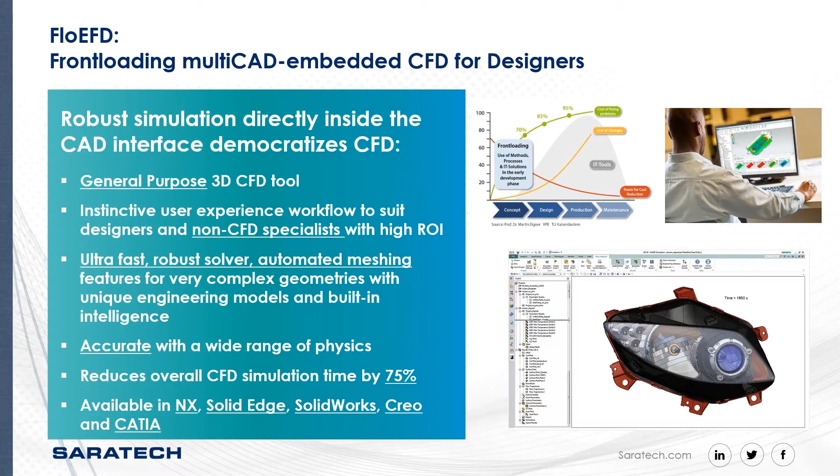So what are some of the capabilities? Well, FloEFD can be used in a wide variety of different applications. We can see here like mixing, electronics cooling, aerodynamics and flow problems in external analysis type conditions. We can do rotating equipment for things like pumps and fans. We can do combustion, radiation, aerodynamic heating, even free surface models now as well. So really a very well established general purpose 3D CFD tool, again, aimed at the designer rather than the analyst.

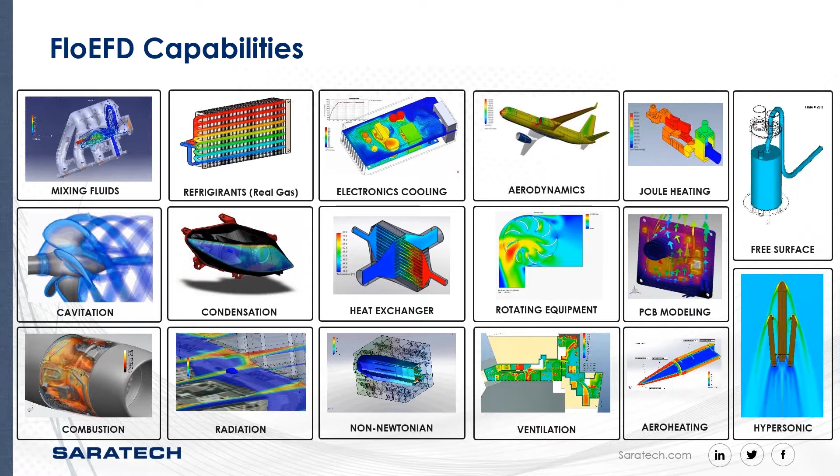So we're really trying to democratize this tool and get regular CAD users, Solid Edge and NX users, to be able to perform the analysis rather than having to go to that analysis team and wait for results to come back. So just a quick video of it in action.

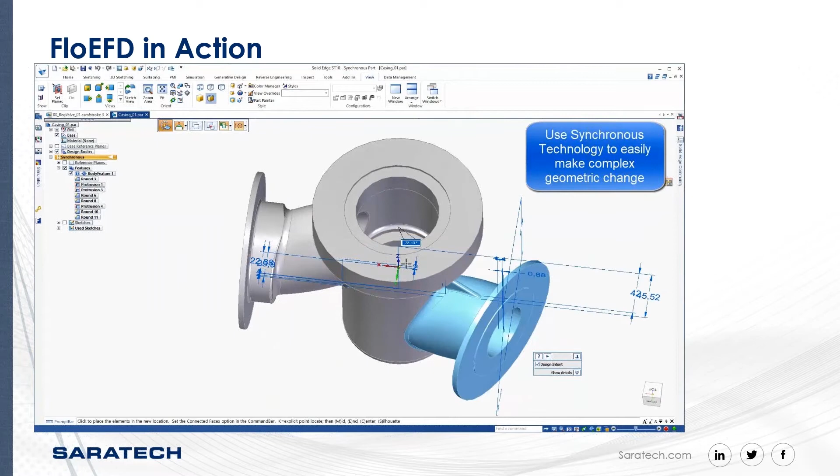So here we have flow through a valve in Solid Edge. The nice thing about being CAD embedded is that you can make changes really quickly. So let's, for example, make a synchronous change on this valve. We're going to change the angle on the outlet of the valve, so let's just rotate that through an arbitrary angle, maybe about 45 degrees. There's our updated geometry, and then our analysis will instantaneously keep up with that geometry. So there's a lot of benefits to being CAD embedded, such as being able to utilize that parametric CAD data and make changes really quickly.

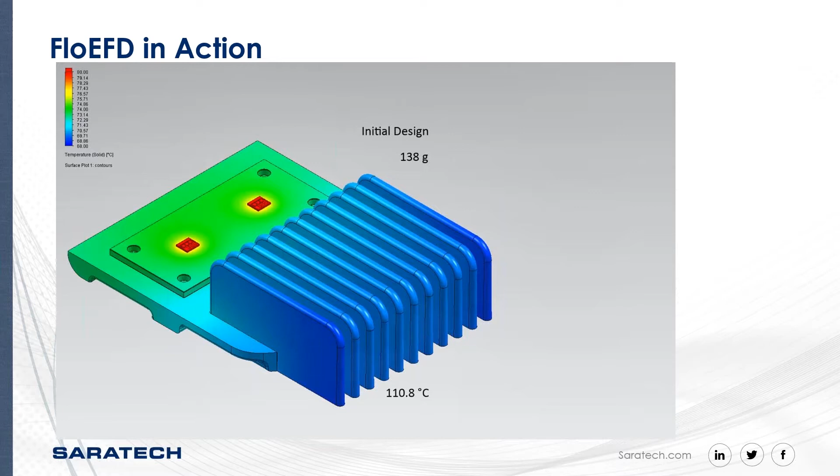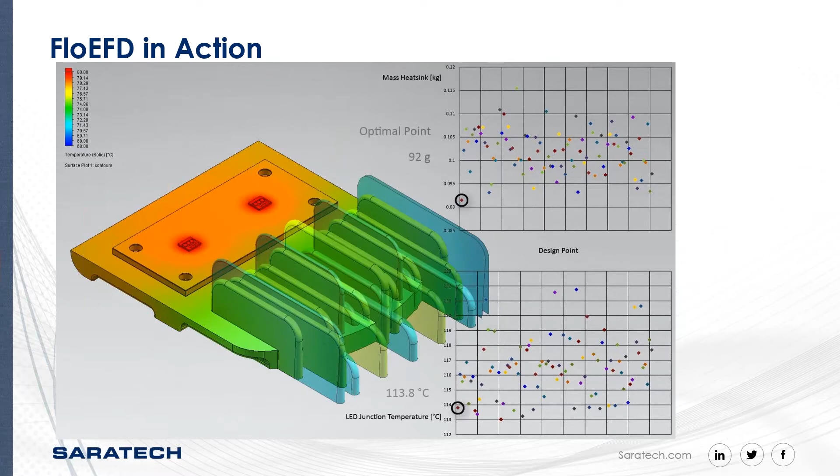Here's another example. So here's a heatsink that we're designing, an LED streetlight type example. We have an aluminum die-cast heatsink, and rather than just going with the base case design, we can start to do design exploration. And again, because we're CAD embedded, we can push and pull surfaces, we can control pattern parameters, we can vary the different heatsink fins to achieve the most optimal cooling for our particular application, within the constraints, the packaging constraints of the heatsink, the allowable sizes. So it really allows you to do that what-if study and optimize your design for performance, and being able to do that quickly within your CAD system.

So today we're going to be talking about mesh. Now in FloEFD, there's three different types of mesh. There's fluid, solid, and what's called fluid solid interface cells.

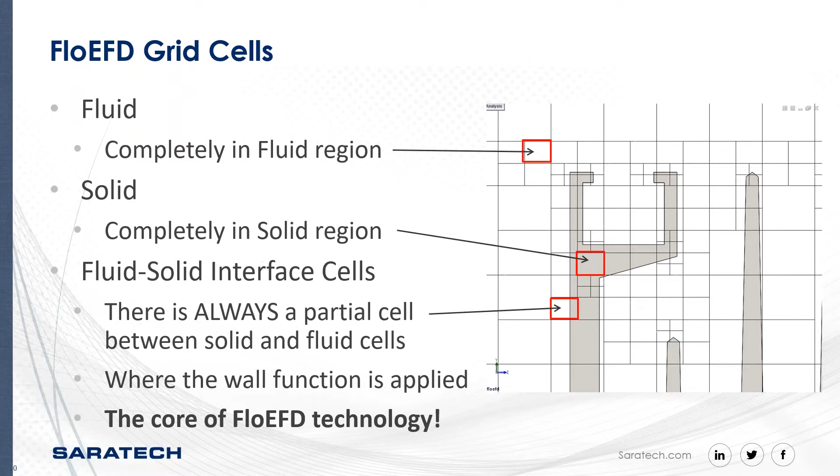A little bit painful — they used to be called partial cells, but fluid cells are completely within the fluid region, solid are completely within the solid region. Those are fairly easy to understand, but there's always something called a fluid solid interface cell between them. So here's a fluid, here's a solid, and there's always this interface cell. That's where the interesting stuff happens in FloEFD, because that's where the solid and the fluid touch each other, and that's where the convective heat transfer happens. That's where the boundary layer forms in the model, and that's really the core behind the FloEFD technology — being able to use these fluid-solid interface cells.

Now in FlowEFD, we use something called an immersed boundary Cartesian mesh. So what that means is that we create these cuboidal grid cells in the model, and then to refine the grid cells, we split that using octree refinement. What does that mean? We take a single large grid cell like this, split that into 4. It's actually 8 in 3D, so that's your octree. Split that into 4 again, 4 again, 4 again.

It's a very structured way of increasing mesh density, and it's very easy to add or remove grid cells if they're required or not. One of the main rules of FlowEFD is that neighboring cells cannot vary by more than 1 level. There's various different level sizes: level 0, level 1, level 2, level 3, and we'll see this in the demonstration. You'll see that you can't go from a tiny grid cell to a huge one. You have to go through this splitting ratio, this 2:1, 2:1, 2:1 ratio, and the aspect ratio of the grid cells is maintained as you go smaller and smaller.

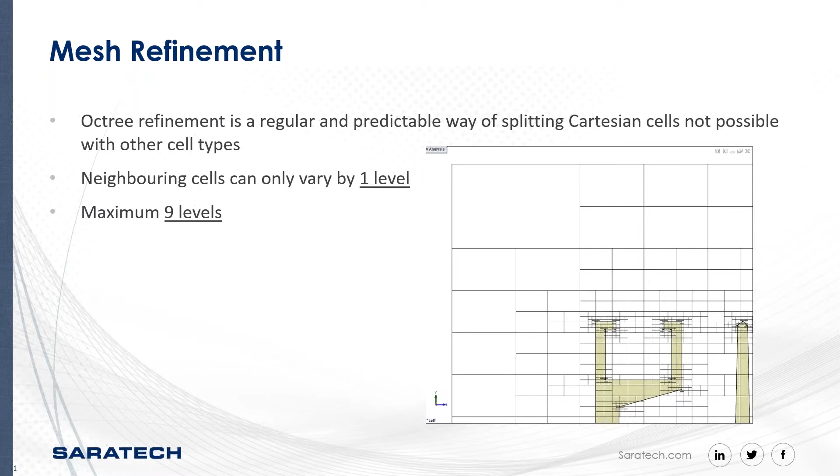Now, within solid cells, FlowEFD can have multiple materials, up to 36. When it's a conduction-only problem, the solid bodies defined by the CAD geometry are very well defined, and you don't need to increase the mesh density so much when you're just concerned with conduction. Convection is a different problem, or flow-based cells are a different issue, but for conduction, you can have a lot of materials in a single grid cell. Like this one over here has got 4 materials based on the geometry that's been created, for example.

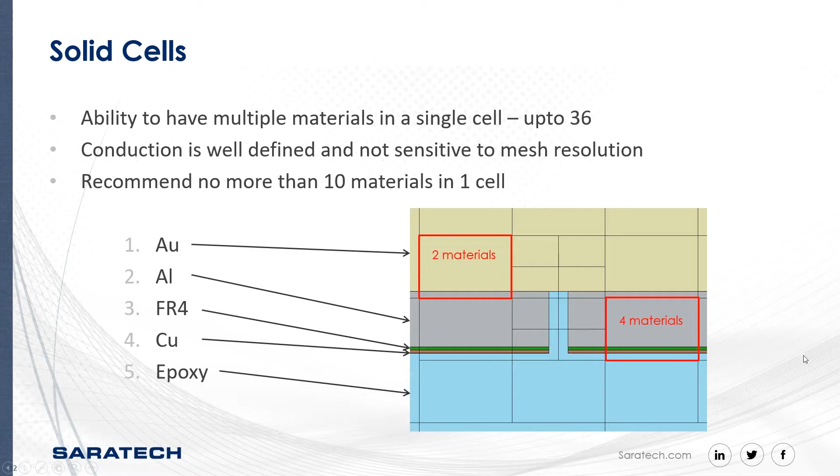I wouldn't be too happy running this grid cell without further refinement. This one here has got 1, 2, 3 control volumes. So we recommend no more than 2 control volumes per partial cell if critical, and 2 is the lowest that you can go down to in terms of control volumes.

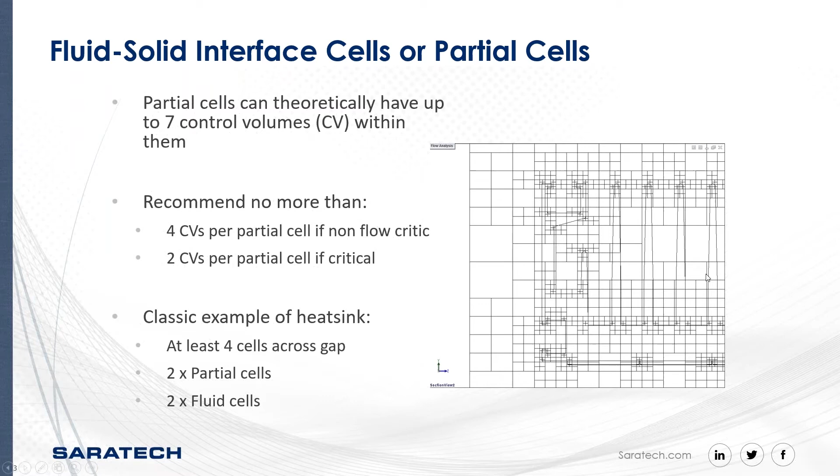Well, we can increase the mesh density. Remember the octree splitting that's going on. So we take that grid cell, we split it into 8 again. That increases the number of control volumes. So that cell previously has now been turned into like a 3 control volume cell with a fluid cell right next to it. We can keep refining and refining to increase the mesh resolution and also the result resolution.

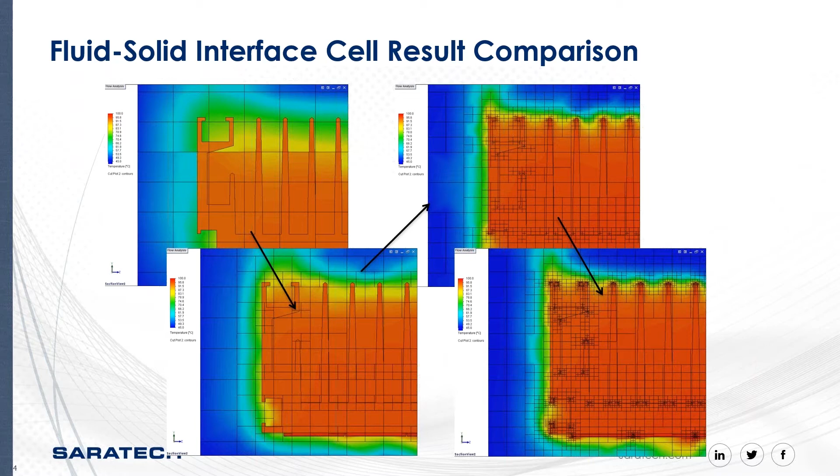So here we have a fluid-solid interface cell result comparison, where as you increase the mesh density, the image gets sharper, the resolution gets better. We're getting more accurate simulation results at the cost of higher computer resources and higher solve times. So there's always a trade-off between mesh resolution and the computer and time resources available to you.

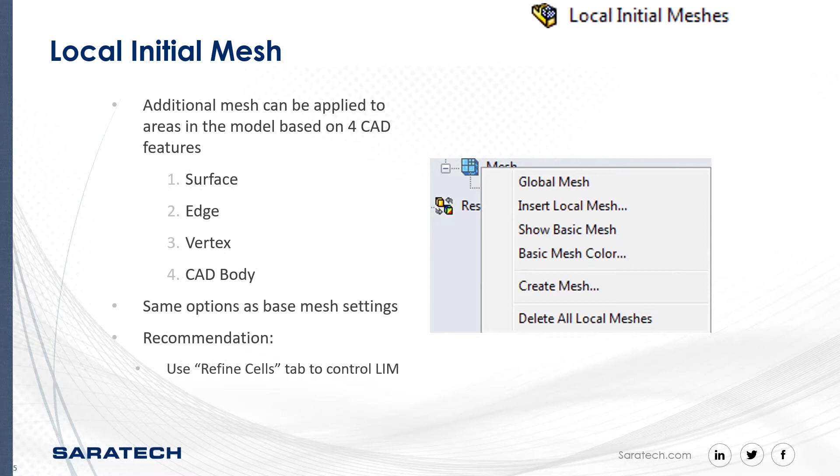Okay, so let's talk about actually refining the mesh. We can use something called local initial meshes in FloEFD to increase mesh density. We can apply a local initial mesh on a surface, an edge, a vertex, or a CAD body. By clicking on these parts in Solid Edge or NX, we can increase the mesh density using the leveling system. Okay, so I'm going to skip over that one.

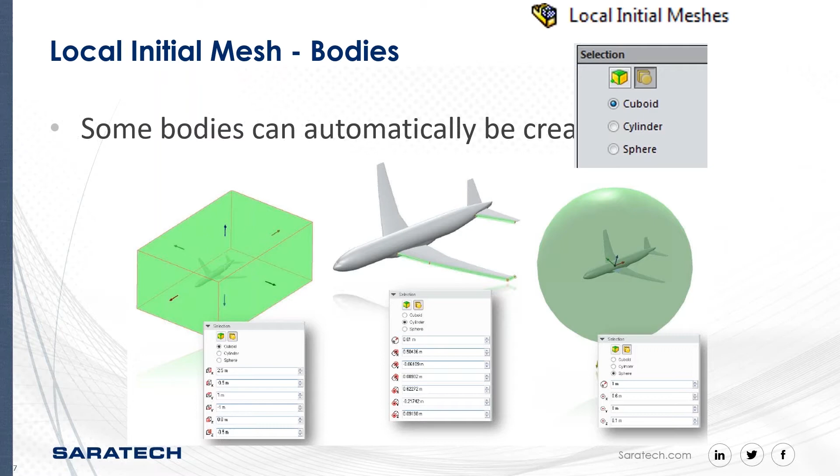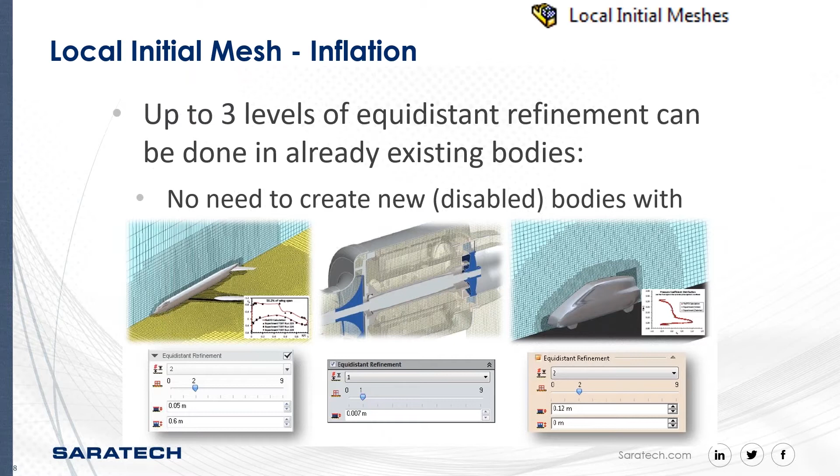We can also use bodies, arbitrary bodies, cuboids, cylinders, or spheres to actually increase the mesh density wherever we want, and we can size those and place those wherever we wish. And we also have something called inflation in the model as well, which will increase the mesh density as you move away from a body, which is particularly useful for external aerodynamics type cases.

So what I want to do is just kind of jump into the software and show you a little bit of that. First of all, I wanted to show you in the NX version. So this is a quick release fluid coupling. You probably use one of these at least once a week. Whenever you fill your car up at the gas station, this is a breakaway valve.

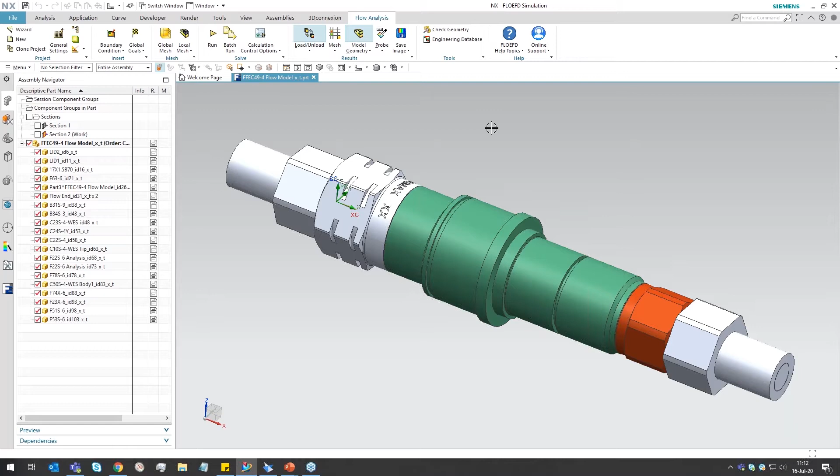So if you leave your gas nozzle inserted in your car and you drive away, this is the device that will break away and keep the gasoline from spilling everywhere. There's a male part and a female part, they connect together, and they're designed to break away and quick release with minimal fluid loss.

And if you're a designer designing something like this, you want to make sure that you're getting sufficient flow through your valve whilst minimizing the pressure loss in the system.

What's the actual upstream pressure required to overcome this resistance that this valve is causing to your fluid system?

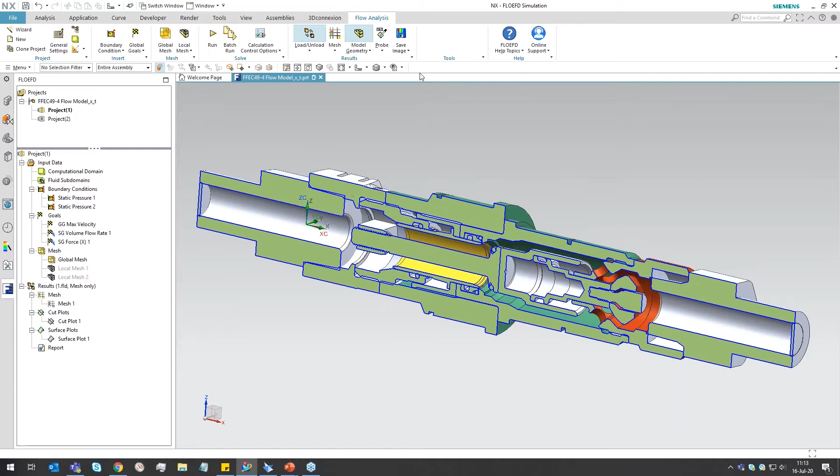Okay, so let's have a look at the FloEFD mesh first of all. I'm just going to go normal to the screen and visualize what we call the base mesh.

The base mesh is overlaid on the screen, and these are level 0 grid cells, and I've manually set these to 2 millimeters in size each.

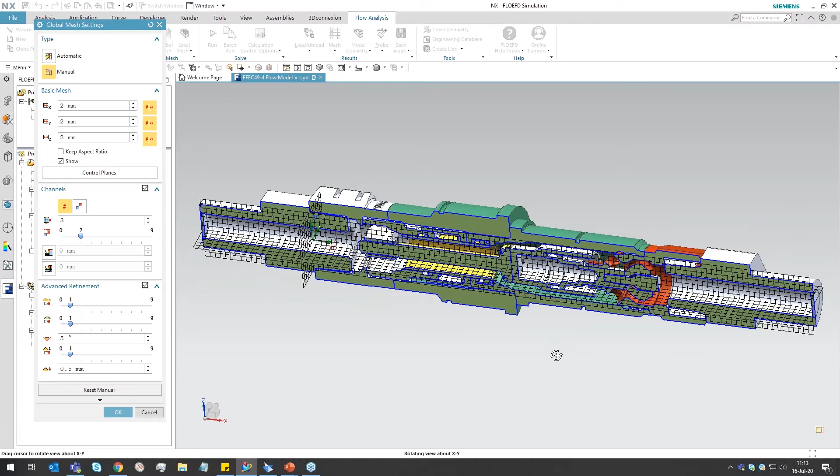If I just rotate that in 3D, you can see that in all three directions we've got these 2 millimeter grid cells, and that's important to keep these values as uniform as possible, so we've got that nice aspect ratio of 1 to 1 to 1.

Now, like I mentioned, this is your level 0 grid cells. To increase the refinement level, we can actually preview that, and it's struggling to see that, so let's go to display refinement level.

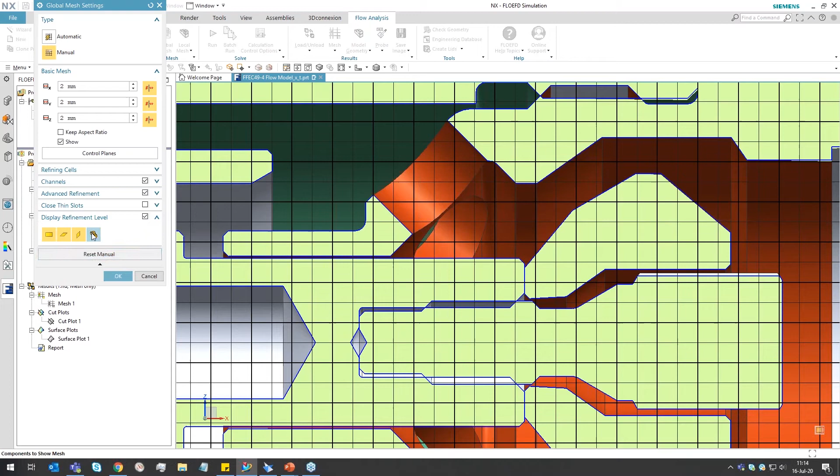Okay, so you can see, here's my level 0 grid cells. As I move this slider bar up, look how they split into 4 again. So if we look at this one, for example, or this one, level 1, level 2.

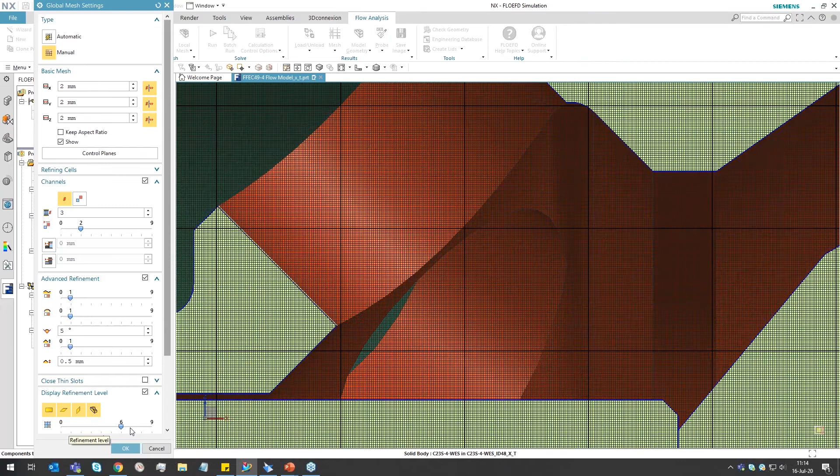Level 3, 4, so you have this exponential increase in grid count as you go down and closer and closer, all the way up to a maximum of level 9. If we zoom out, it looks completely black now because the grid cells are so small.

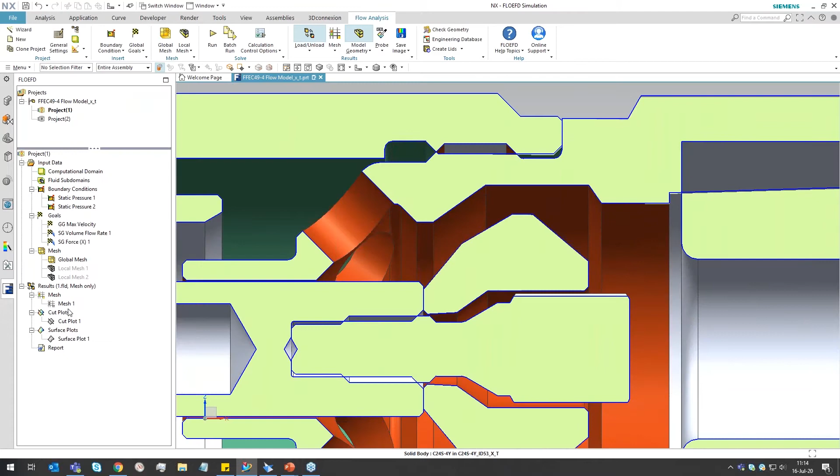So you can control the mesh density using these slider bars to increase or decrease the mesh resolution based on your requirements. Now let me just cancel that and actually show you what the generated mesh looks like.

So here, based on automatic settings, the software has created the grid and they're colored by this refinement level - level 0, level 1, level 2. And I've stopped the mesh from increasing beyond level 2.

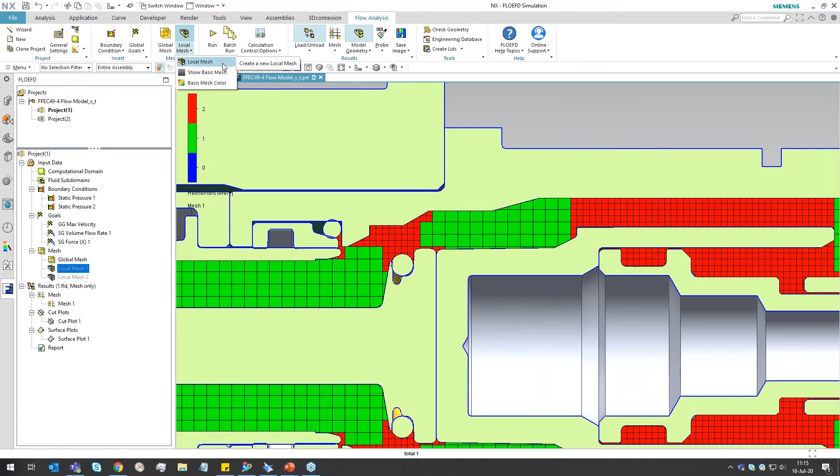And if we now start to use local initial meshes, which are up here, you can see that you have this local mesh option. I'm going to turn on a couple of local meshes that I've created previously.

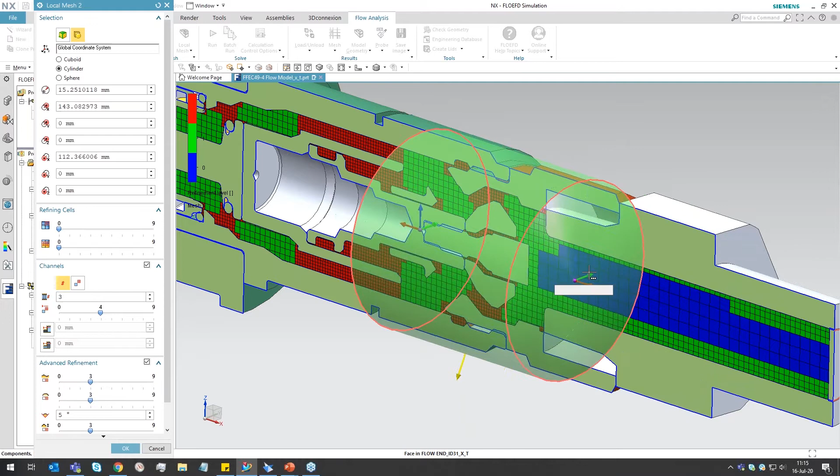So one of them, for example, is a cylindrical local mesh region. If I go into the properties of this, you don't have to create an NX part or anything like that - it's just a cylinder, which I can click and drag, make larger, make this taller. So you can create these arbitrary volumes, position them, and then tell the software that you want increased mesh resolution in those areas.

And I'm going to mesh the model real quick. This just takes a couple of seconds. It's a pretty small model, so it's just preparing the model now.

It's mesh refining. I'll get a feel for what the total grid count on this model is going to be. I know this is pretty low, but this local mesh is a way of increasing it from the base that we saw just a second ago.

So we'll just let this finish capturing. Should just take a few seconds here. And then look, we can see we've got...

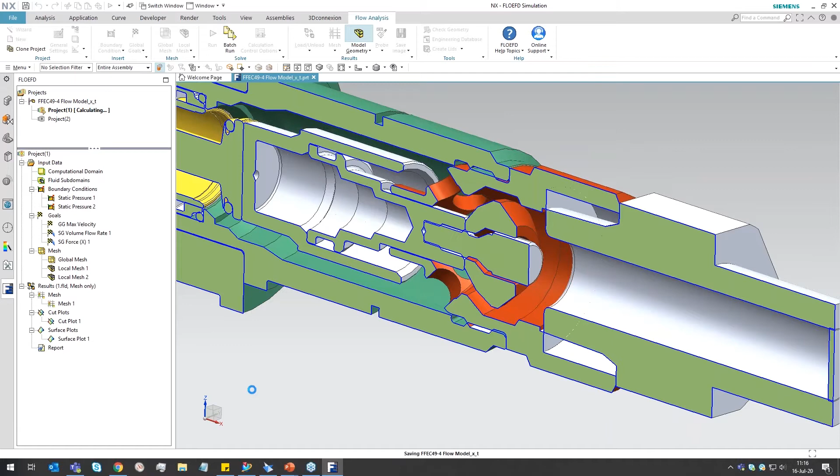350,000 grid cells total. Okay, so that's interesting. That's important information for me because that will tell me, right, do I have enough RAM in my machine to solve that? Absolutely, 350 is next to nothing, so that's no problem whatsoever.

But now if we look, and let me just auto range this - all right, so now if we look, we've got much finer, smaller grid cells in these small gaps, but only within that region that I specified, right? So it hasn't put them everywhere.

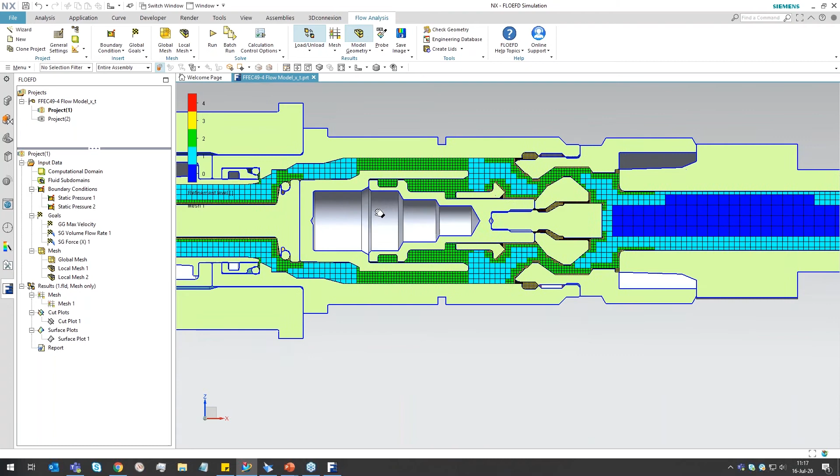I've also got finer mesh around this threaded portion and this valve over here. So you can apply base grid and then local initial meshes within the model to increase in certain critical areas that you yourself have defined in the model.

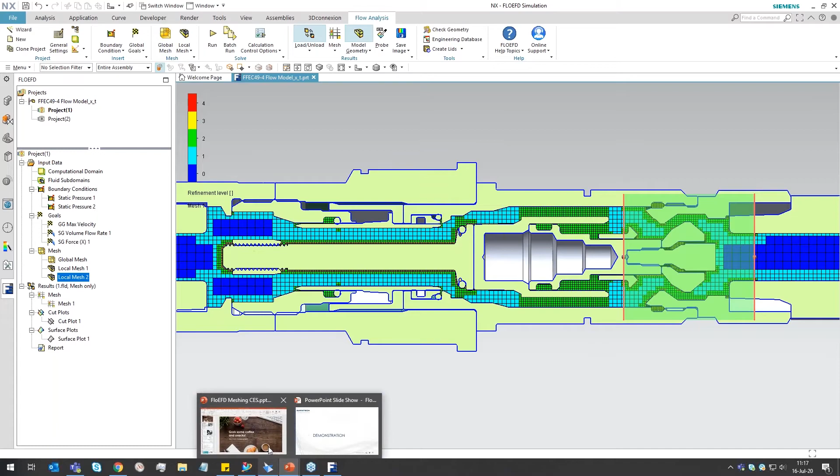Okay, so let's go back to the PowerPoint, and we're going to talk about solution adaptive meshing next. So this is a very advanced feature available to everyone - you don't need an extra license or anything like that, it comes with the base FloEFD.

But what this does is it will increase the mesh density based on the actual solution. So if you're finding that there are flow separation zones or high turbulence zones or areas of high parameter gradient,

like temperature gradient or velocity gradient, the software will recognize that and realize, I need better resolution here because there's too much of a change within this cell.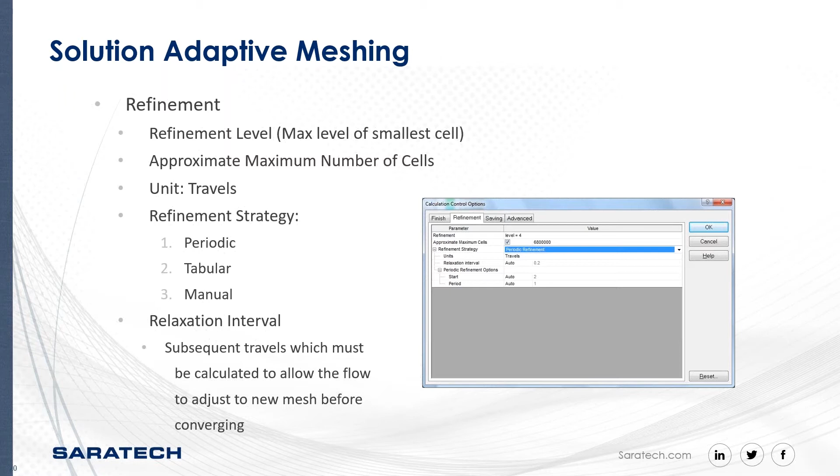It will then split that cell, and split it again, and split it again until the gradient parameters have been satisfied. Okay, let's look at an example.

So here's a filter. We've got flow going from right to left. It goes through this screen. It's a hydraulic filter, designed to remove larger particulate matter from hydraulic fluid.

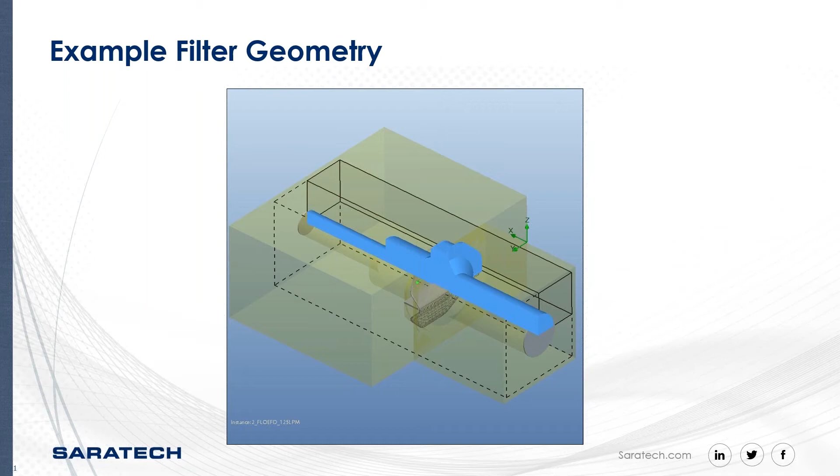And what does that do to the results? Well, a bit like a digital picture, the more grid cells we have, the finer the image or resolution is going to be. The more pixels we have, the better the resolution, but the more space it takes up on your disk.

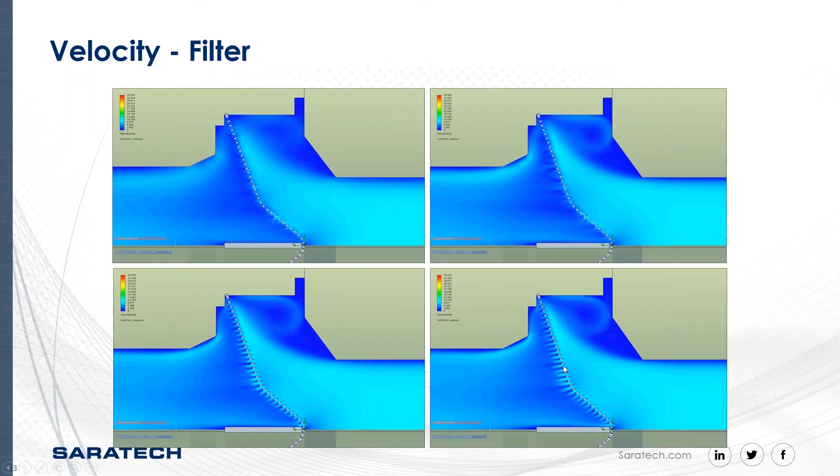So you can see as we increase the mesh density, we start to see finer features in the flow. We start to see these little jets forming, and that's a direct result of that extra grid around the filter element.

What we're really looking to do is achieve a mesh independent result. That means we need to manually increase the mesh density in the model until the results stop changing. So here's the delta P, the pressure loss through that filter, against an increasing mesh count.

Here's our first one with a really coarse mesh. So how do we know that result's any good? It's giving me 4.2 bar of pressure loss. Is that the right answer? I don't know. Let's double the mesh count and see.

Well, when I doubled it, the result dropped 6%. That was nowhere near good enough. Let's double it again - the results dropped 9%. Yeah, that result wasn't good enough either. If I double it again, it only drops 1% this time.

So probably this was okay. And if I double it again, it only changes 0.5%. So this is a test you need to manually do to understand if the grid you've applied is any good. FloEFD tries to make that as easy as possible for you.

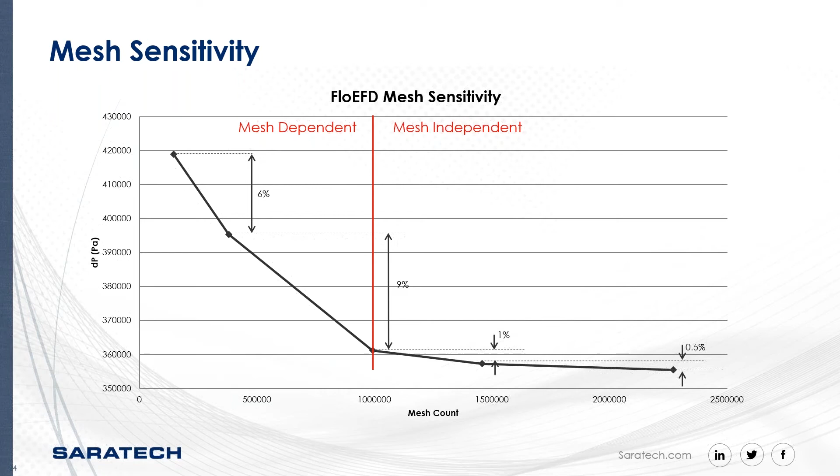I'll give you another demonstration. So here we have an aircraft. This time we're in Solid Edge 2020. FloEFD works exactly the same way. Let's have a look at the mesh that's been applied.

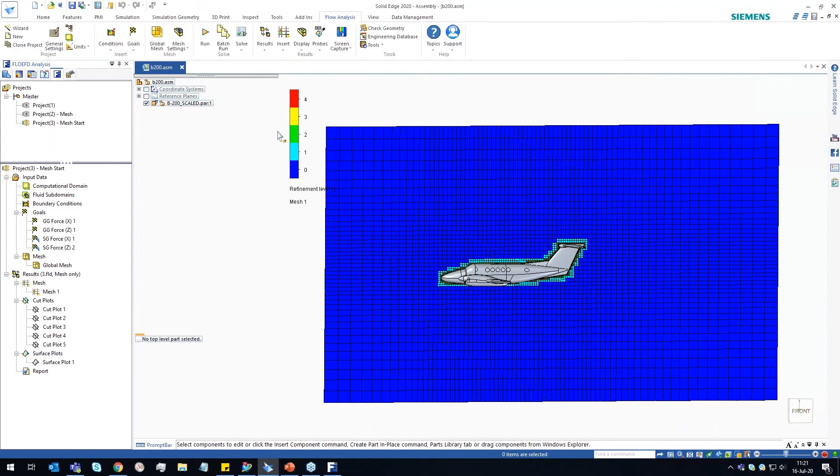So here we can see the aircraft mesh. As I zoom out, you can see the size of the computational domain. By the way, we're taking advantage of half symmetry on this aircraft. So we're just doing 1/2, which reduces our mesh by half.

Let me just hide that again. But you can see the aircraft. One important thing to note is that we have something called aspect ratio skewing. So closer to the vehicle, these dark blue grid cells are smaller, but in the far field they're much larger. You can stretch and skew the grid cells to put larger ones in the far field where there's not actually that much flow going on, especially in front of the aircraft.

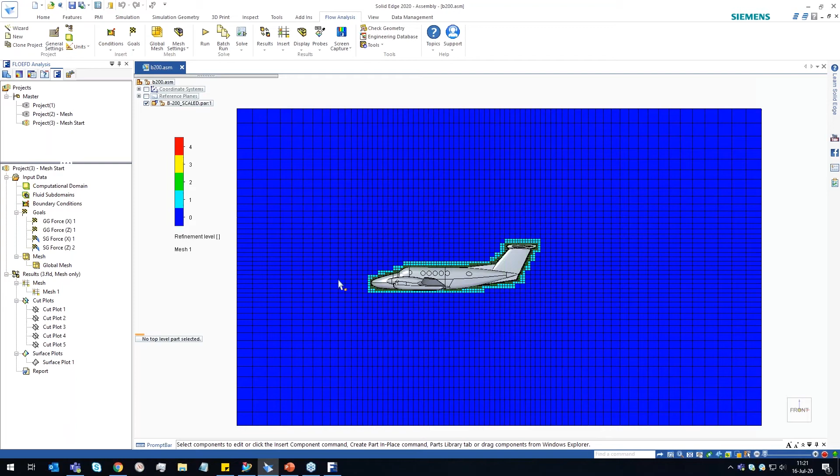So there's the mesh on this vehicle. And have I used... no, I haven't, that's going to be the next one. So let me unload this one and jump over to my other project, which just takes a couple of minutes to mesh. I've already pre-meshed it, but this time I've used something called equidistant refinement.

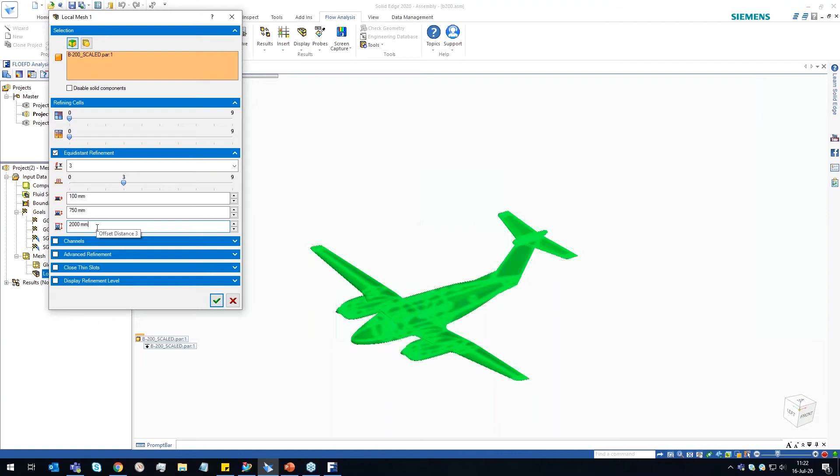What is that? Equidistant refinement allows you to create nested regions of increased mesh density. So I've gone 100 millimeters, 750, and 2000 millimeters away from the body.

So if we have a look at the actual mesh, and let's visualize that - it's taken the outer shape of the vehicle, and look, this is the first 100 millimeters, 750, and then 2000 as you zoom away from the aircraft.

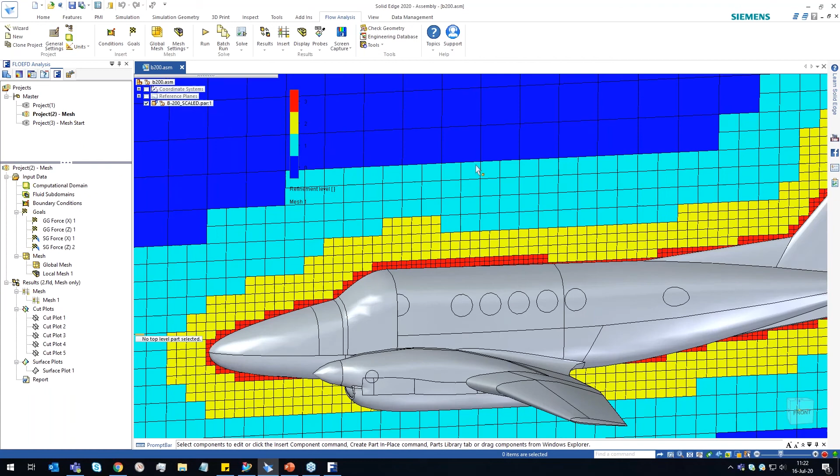This is obviously not full size, this is just like a model. But this just stops those very large grid cells from abruptly changing into these smaller ones. You still have to go down in the levels, but you're creating this buffer around the aircraft to increase the mesh density gradually.

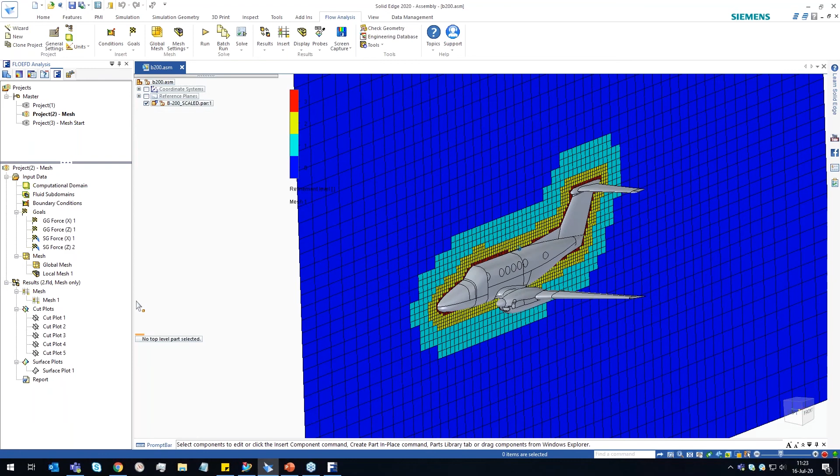And in FloEFD we can visualize this. As I move it through, you'll notice that it's the same on the wing profile as well as I move away from the aircraft. And if we look in the top direction, you can see that's very much the case.

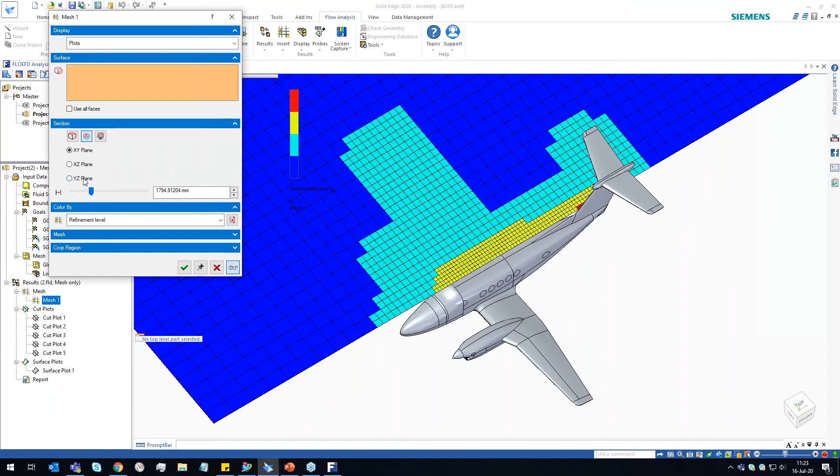We do have a 3D mesh on here, and if we look cutting through the aircraft as well, let me just cut through the wing. You still have that buffer, the shape of the aircraft all the way around the vehicle.

All right, so now let's have a look at the actual solution adaptive meshing. I'm going to run this live now, so let's run this calculation. The nice thing about FloEFD is that we can actually preview the simulation as it's solving. Okay, it's just preparing the model now, and we are going to start solving as soon as this clicks over to one iteration. We'll start to see some results.

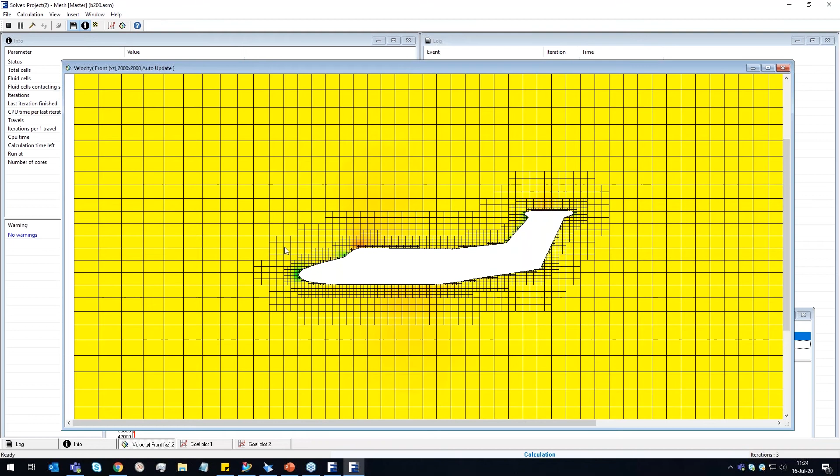So I'm plotting velocity alongside the mesh, and as the iterations count up, we can visualize the forces. This is the amount of drag and lift being created by this vehicle. Let me just tile these real quick and come over here, something like that.

Okay, so these are pretty much steadied out. I'm not going to run it all the way through to convergence, but what I am going to do is force a mesh refinement. Let's just hit the refine button, this little hammer icon up here in the toolbar, and that will stop the calculation at 28 iterations. We can see our base mesh was at 81,000, really low. Then the software is going to automatically, based on the results, increase the mesh density.

So you can see it's mesh capturing, and then it's going to just carry on from where it left off. It will interpolate the results and carry on. So as soon as this turns to 29 iterations, we'll see an increased mesh density, and I suspect that the drag and lift values being generated will change as well.

So it's just preparing for the calculation now. Let's have a look at this one. I think that's the same graph, so we don't need that. You can see, look, it's jumped up to 249,000.

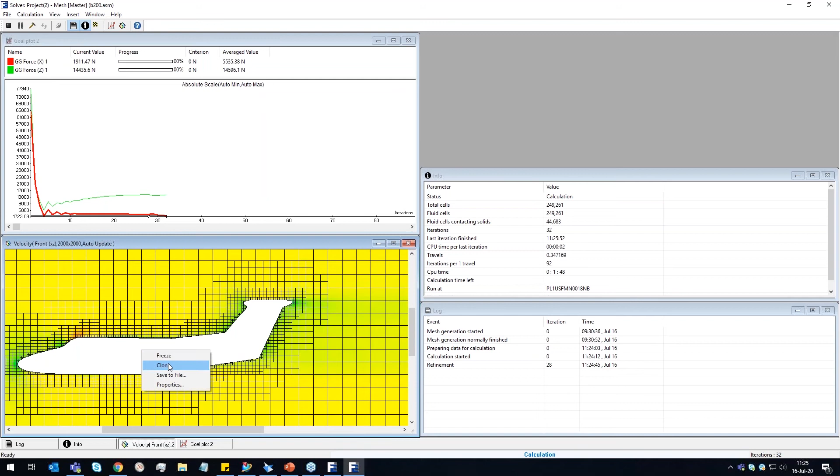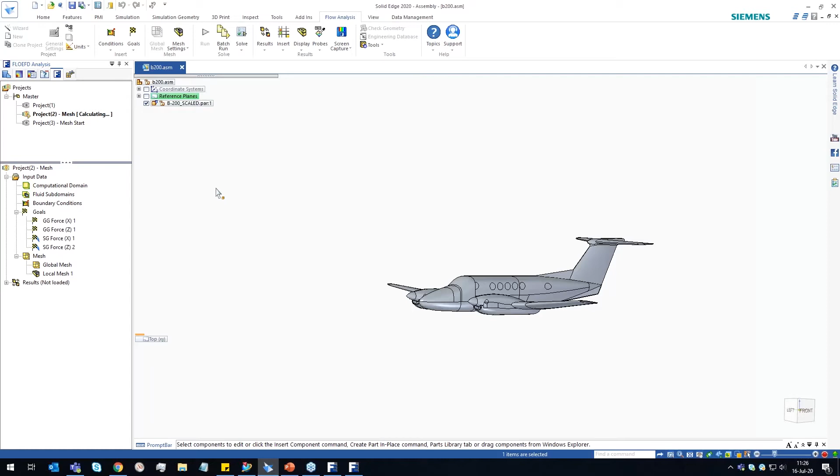Did that update itself? Let's clone that one and create it again. Let's just create that preview on the top plane. Let's look at the velocity and also the mesh. Maybe that was in the wrong plane, so apologies. Let me just grab the correct plane in the model, which is going to be this one, the front. Let's look at velocity, 2000, show the mesh.

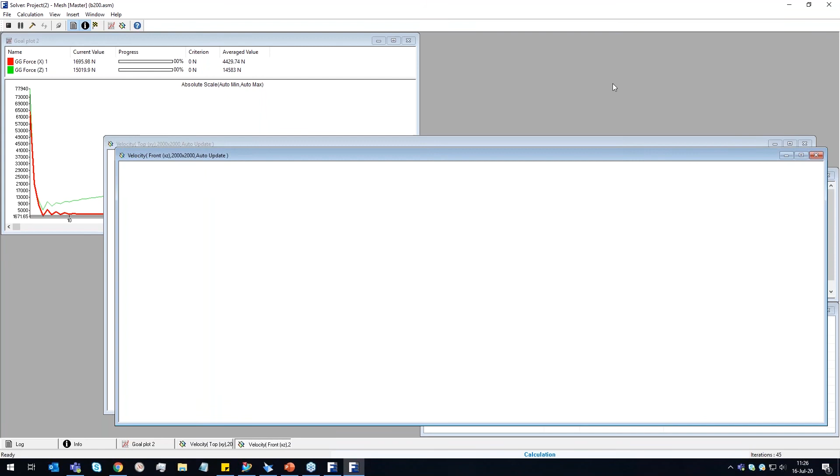It just needs to do a couple of iterations for it to catch up. But what we would see when this preview catches up is that the mesh will be refined around the wings, around the separation areas, and in the wake zone as well. So as the aircraft leaves a lot of wake in the background, we will see that increased mesh in that area to capture things like eddies, vortices, and separation.

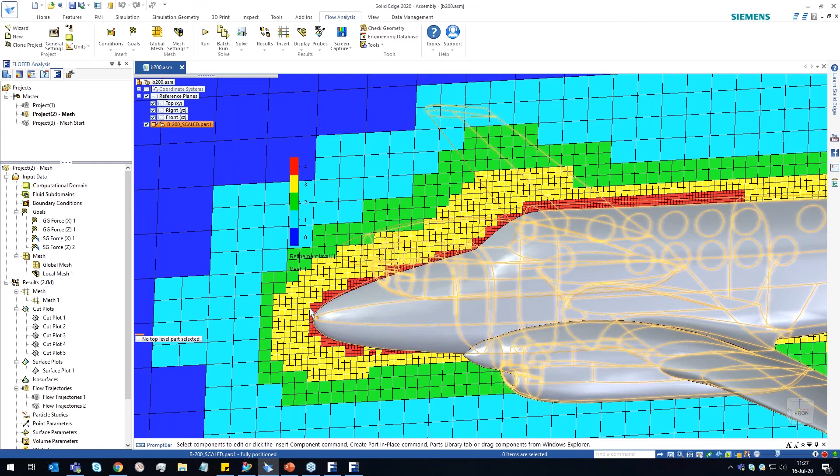So what this comes down to is the fact that with the software, you can start really coarse. Let me just increase this. Okay, here's an example of what I was talking about. The mesh wasn't refined back here, but the software has done this automatically around the actual surface of the aircraft. It's increased as well, and along the tail region too.

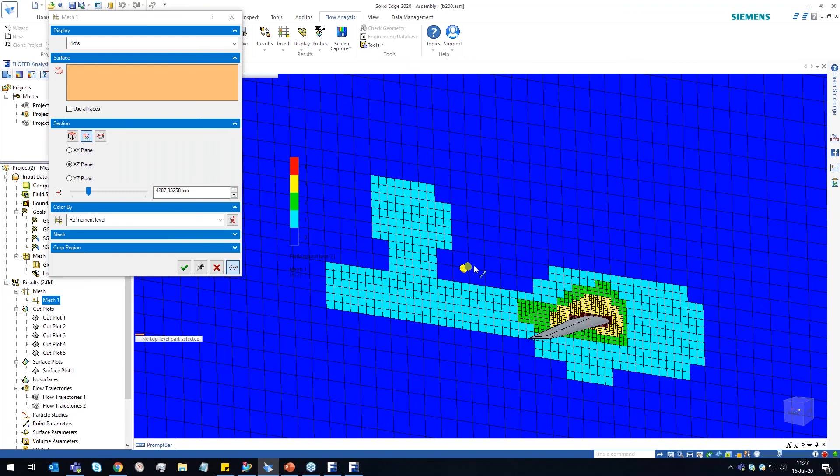So with the software you can start coarse and then let the software do the hard work, letting it work out where it needs extra mesh. You don't need pre-knowledge of what the solution is. You can just let the software do the hard work and increase the mesh density only in critical areas within the model. You can do this multiple times—refine constantly, or at specific intervals, or when certain parameters reach predefined thresholds. Very powerful—you can see around the engine nacelle, things like that.